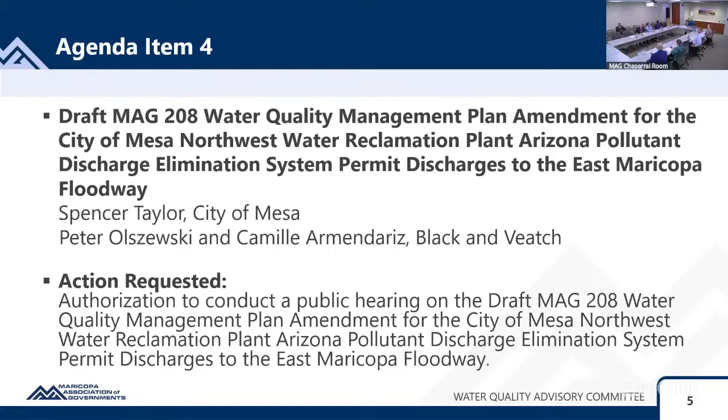Thank you, Julie. That takes us to agenda item number 4, draft MAG 208 Water Quality Management Plan Amendment for the City of Mesa Northwest Water Reclamation Plant, Arizona Pollutant Discharge Elimination System Permit, discharges to the East Maricopa Floodway. This item is on the agenda for action. Spencer Taylor, City of Mesa, will introduce the item. Peter Olszewski from Black and Veatch will present this item. Gentlemen, the floor is yours. Thank you, Mr. Chairman and members of the committee.

My name is Spencer Taylor. I'm a supervising engineer with the City of Mesa Water Resource Department. We're here to request authorization to conduct a public hearing for our draft MAG 208 amendment for our Northwest Water Reclamation Plant, to allow the ability to send treated effluent to the East Maricopa Floodway. No other changes to the plant are being made.

We have Peter Olszewski here from Black and Veatch with a presentation to go through this whole project. So I'll turn the time over to Peter.

Good afternoon, Chair Bay and members of the committee. I'm Peter Olszewski. I'm a senior engineering manager in the Phoenix office of Black and Veatch, and I've been Black and Veatch's engineering manager on the Central Mesa Reuse Pipeline Plants project for 4 years now.

I have a brief presentation here on why we're here today. My introduction will go into a little background on the Central Mesa Reuse Pipeline project, the MAG 208 amendment, a little background there, and then an overview of the Northwest Water Reclamation Plant and the Central Mesa Reuse Pipeline project, and then next steps. If at any time you have any questions while I'm presenting, please feel free to interject.

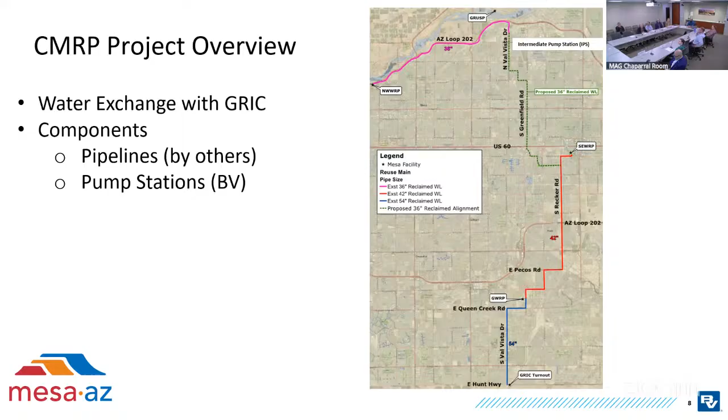This is just an overview schematic of what the plants project is. I'm just going to cover some of the main components here. At the Northwest plant, which we have highlighted above, we're not changing the treatment process, we're not changing the capacity of the plant. We're adding a surge tank and some surge relief to protect the existing effluent pump station and the downstream pipeline.

We are adding, as I said, an intermediate pump station. It has the same capacity as the Northwest Water Reclamation Plant effluent pump station, as it will be the recipient of Northwest's flows. This will be located at the intersection of Val Vista and Thomas.

Besides the pump station, we're also adding surge control, and we have a tank we call a suction tank or break tank. It's a 500,000 gallon above-grade steel tank, and it provides a physical separation between the Northwest system and the downstream Central Mesa Reuse Pipeline system.

At Southeast, we're replacing 2 existing effluent pumps, as that water will now be going into the pipeline and being delivered to the Gila River Indian community. And we've added some additional piping and valves.

And at the Greenfield plant, we're not modifying the effluent pump station. We've just added some control valves to maintain back pressure on the system, because we now have three separate facilities, actually 4, pumping into it. So we've had to make modifications at these 2 downstream plants to protect them and to protect the pipelines into which they're discharging. Most of that, other than the upstream portion, from Greenfield down to GRIC, is existing.

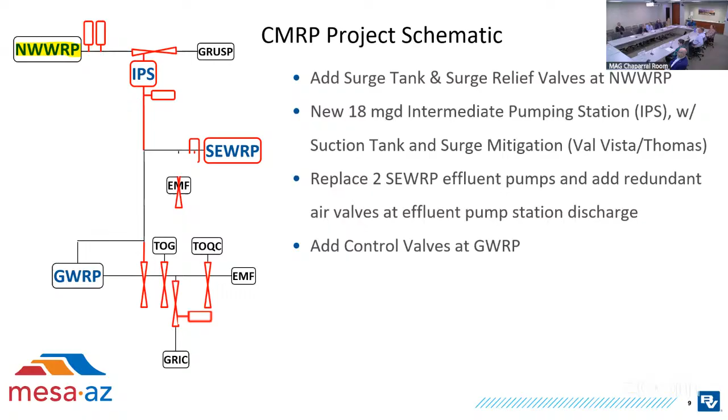As far as the MAG 208 plan amendment is concerned, Northwest is currently permitted for a flow of 18 million gallons per day. Its permitted discharges include basins that are in the Salt River bed adjacent to the plant, just on the north side of the 101. It's permitted for beneficial purposes. It has a reclaimed water permit. It engages in an agreement with the Salt River Pima Maricopa Indian community, and it also provides water to the Granite Reef Underground Storage Project, not on a continuous basis, but on a planned basis.

The additional discharges are now being sent through the Central Mesa Reuse Pipeline system to the Gila River Indian community.

And then we do have an intermittent discharge to the East Maricopa floodway. There is already with Southeast plant that permitted discharge. This is really just in the event that water is off spec for any reason, that instead of going down to the Gila River Indian community, it could be discharged into the East Maricopa floodway. This would be what I would consider a rare and certainly an intermittent event.

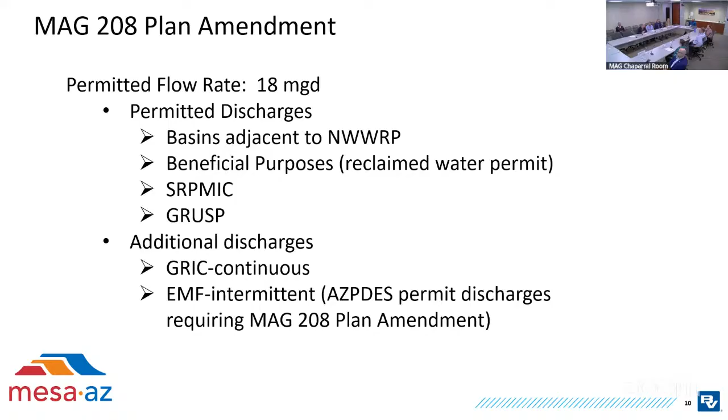Other additional discharges: Southeast, as I said, is permitted to discharge to the EMF. However, with this combined water, there may be the opportunity for this water now to be discharged to the EMF outfall, again modified to add these northwest flows. And then at Greenfield, that also has a permitted discharge to the EMF. It has a permitted discharge to the Gila River Indian community, but because of the addition of northwest, those permits need to be modified.

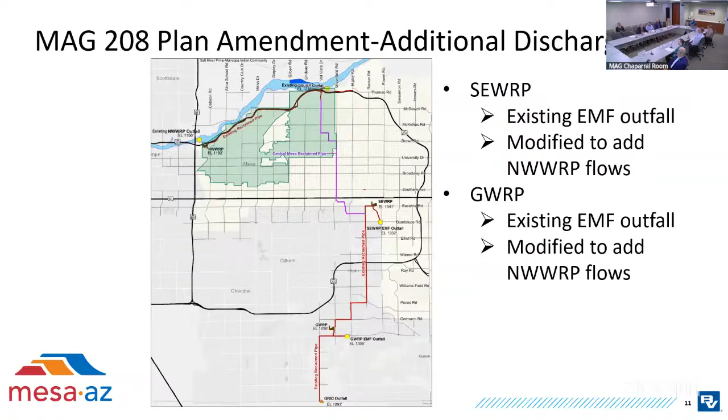No modifications to the treatment process, as I said previously, are taking place with the Central Mesa Reuse Pipeline Plants project. We are adding, just downstream from the pump station but within the effluent pump station, within the plant limits, some surge protection.

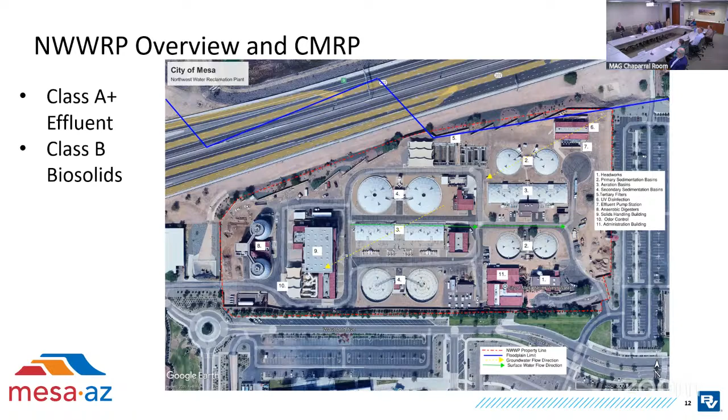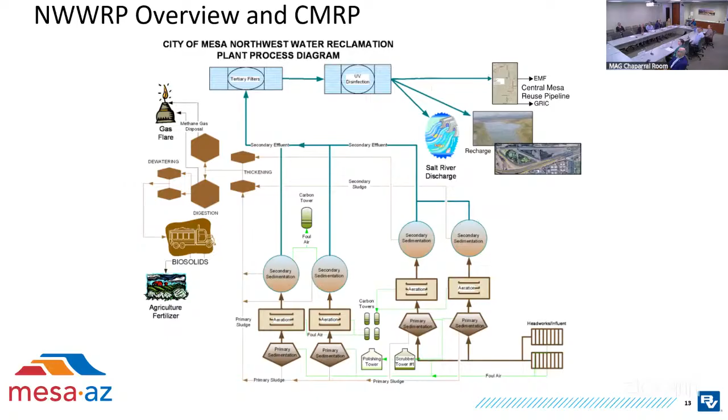Just an overview of what's happening at Northwest, kind of a schematic diagram of the treatment process, and what we've highlighted up in the upper right-hand corner are the existing discharges and the discharge we're talking about today. Again, no capacity change, no process change.

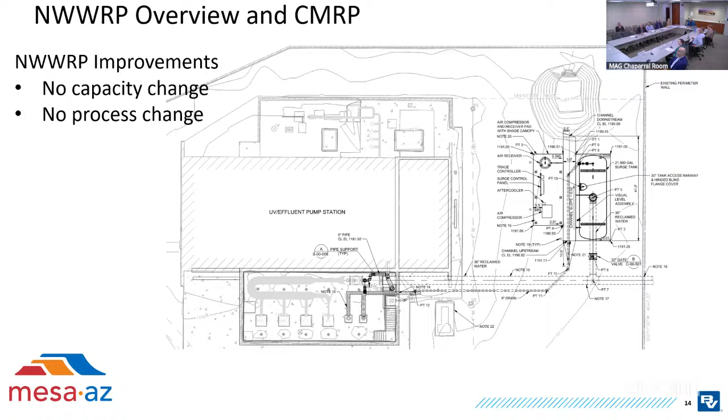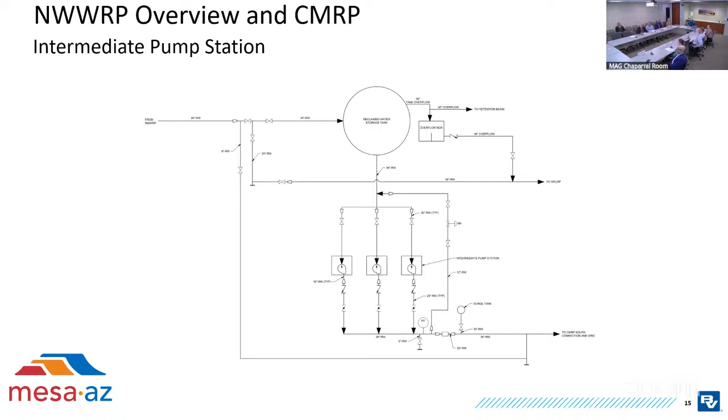And that's my presentation. I'm happy to try to answer any questions you may have.

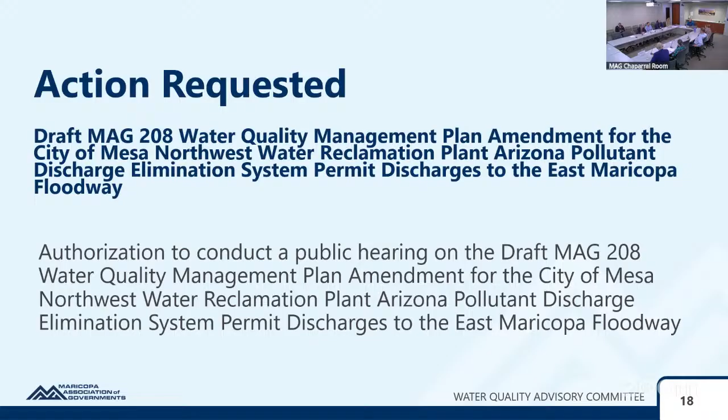That takes us to item number 5 for today, request for future agenda items. An opportunity will be provided for committee members to request topics or issues of interest they would like considered for discussion at a future meeting. Are there any requests from the committee on items they would like to hear?

Mr. Chair, it would be nice to hear from ADEQ on PFAS, both in terms of the future drinking water regulation and incorporating it into APP permits. Perfect, thank you for the recommendation. Are there any other recommendations from the committee on items of interest? Julie, any online? Okay, we'll look into that for future meetings.

That takes us to item number 6, comments from the committee or a summary of current events. An opportunity will be provided to committee members to present a brief summary of current events if you so choose. The committee is not allowed to propose, discuss, deliberate, or take action at this meeting on any matter in the summary unless the specific matter is properly noticed. But if you have something exciting happening in your municipality that you would like to discuss with the committee, now is your time.